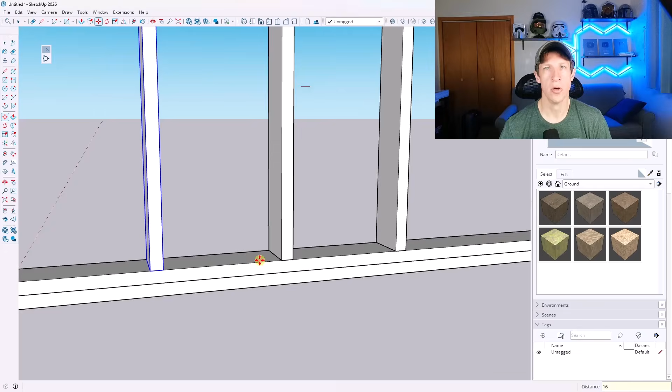In today's video, I'm going to show you a quick tip for creating framing that follows along a sloped surface without you having to manually fix every single board. Let's go ahead and jump into it.

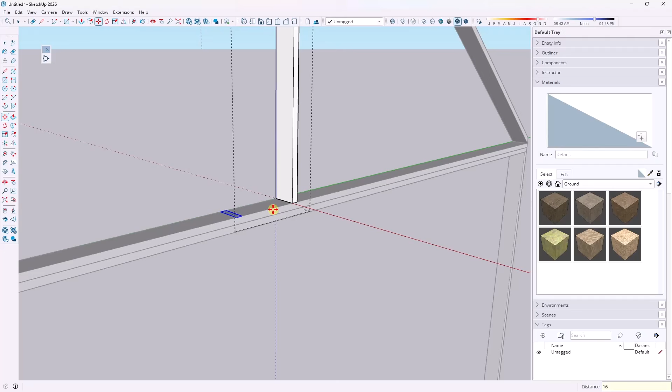Let's say I've got this central piece in here, and I'm just going to copy this over by 16 inches because I think this is going to be a 16-inch spacing. I'll paste this in place right here.

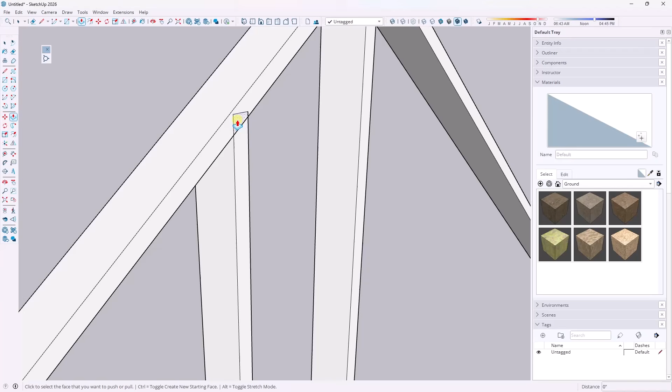Now, what a lot of people do is push-pull up to a certain point, either push-pulling it through right here or push-pulling it short and cutting the object off, which is fine. That's how I would do this as well - I would run into this, draw a line across, and push-pull the face across to remove that material.

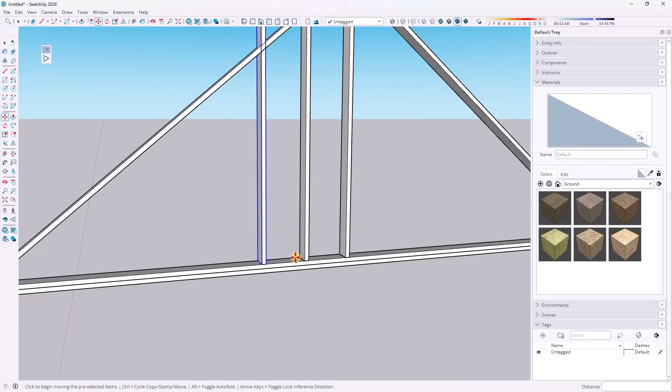Now I have a board that repeats over and over again. But the problem is if I try to copy this over 16 inches - remember, you can tap M, tap Control to go into copy mode, and copy it over 16 inches - if I create a bunch of these copies, times 10 or times 5 or whatever, I just type in star, a number of copies, and hit enter.

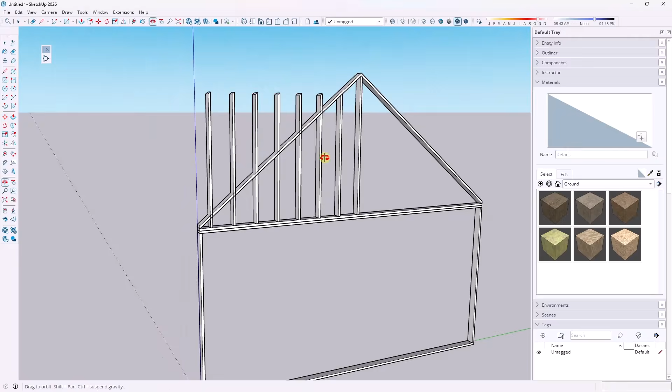Well, the issue here is that I'm going to have to go through and manually cut out each one of these boards, which is not ideal. However, there's a quicker way to do this, which I use all the time, and it's actually using solids.

Basically, I'm going to take each one of these objects - remember that Solid Tools is a tool that allows you to take solid objects like these and interact them together. If I use Solid Tools, I can take all of these objects into an outer shell, which combines everything into a single solid piece of geometry. So now I've got a solid group with the solid shell.

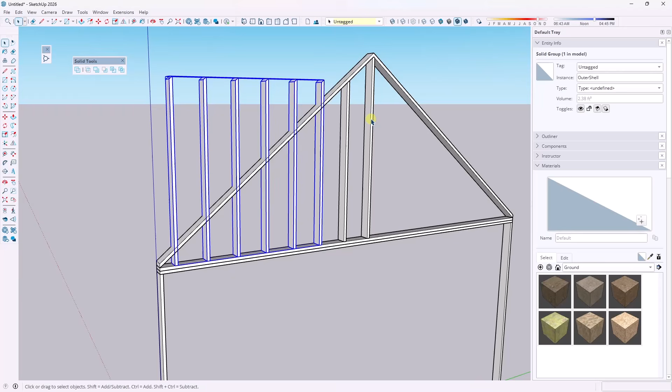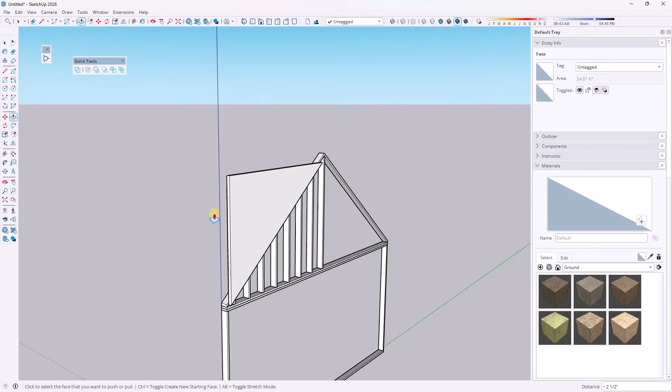Now what I can do is use another solid to remove the material. In this case, I could just draw a line down along this face, then draw a line back across here - basically just drawing a face. Now I can take this and push-pull it forward a little bit, and push-pull it backward a little bit, then triple-click on it and make it a group.

Now this is also a solid - this is a solid, and this is a solid. What that means is I can take this object and use the subtract function to subtract the material and the studs on either side here.

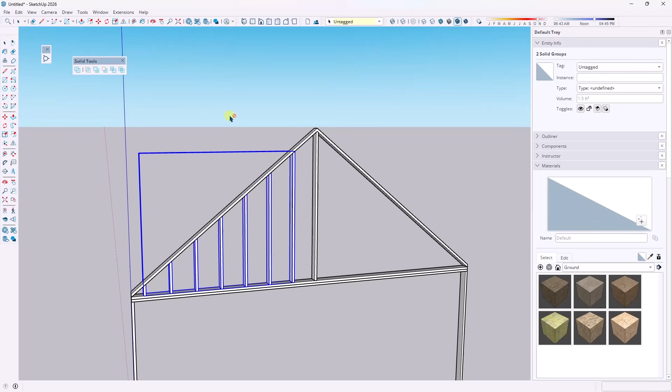Then if I wanted to copy these over, I would probably just take all of these and do an outer shell to make them a singular object. But then I could use the flip tool in copy mode, click and drag a plane, tap Control to put it in copy mode right here, and let it back up.

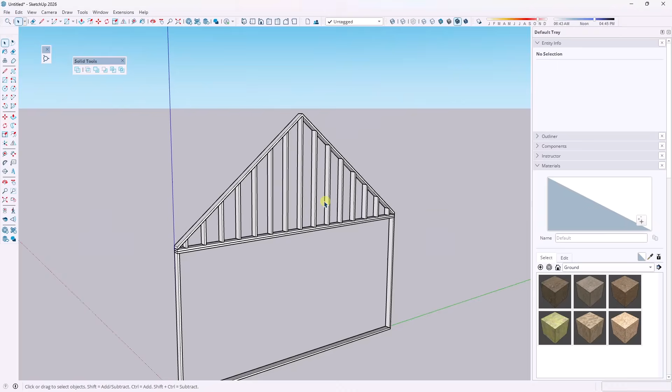So now I have framing that runs all the way along the underside of this sloped edge without me having to manually come in here and do that over and over again. And while we're here, we may as well do this on the bottom as well, because you can use this to cut your window openings.

So I'm going to use the move tool in copy mode, create a copy at 16 inches, then type in times 10 or times 15 - in this case we'll say times 14 - in order to create our studs down here.

You could definitely align these if you wanted to - if you'd rather have these align with the studs that are right here, you could just create one copy and use the array function to copy this across. I don't really care how you create your studs - you can do that however you want.

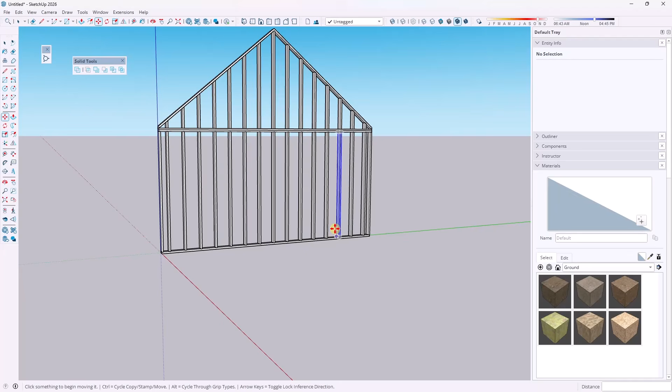But say you needed to create a door or a window, you could do the same thing - take these objects and combine them real quick, using the outer shell function to create a solid with all of these objects. You can see how this is now a singular solid.

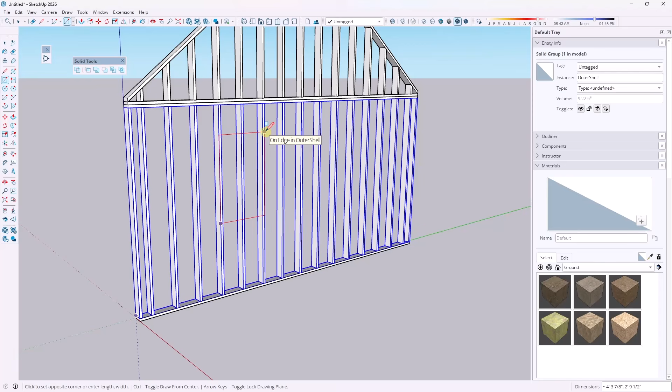Now, wherever your windows go - say you have a window on your wall that's going to be 4 foot by 4 foot or whatever, we'll say 4 foot, 4 foot right here - you could just use this tool in order to pull this across, like so.

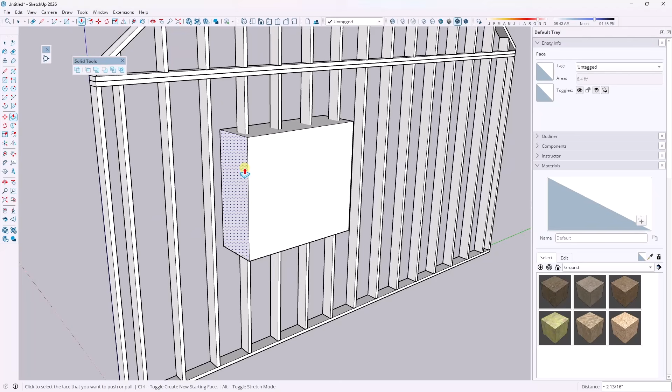In this case, we're probably going to have to add some framing on the sides, so you might even make this a little bit bigger than you actually want your window to be, just to remove that extra, because you're going to have to come in and reframe some stuff anyway. So you could take this whole thing, use the group function, then subtract it from your wall, and now you've got an opening where you're ready to come in here and frame out the inside of your windows.

So again, it's just a really quick way to remove all of that material without having to mess around with intersect faces with model or something like that. Using solids like this can save you a ton of time.